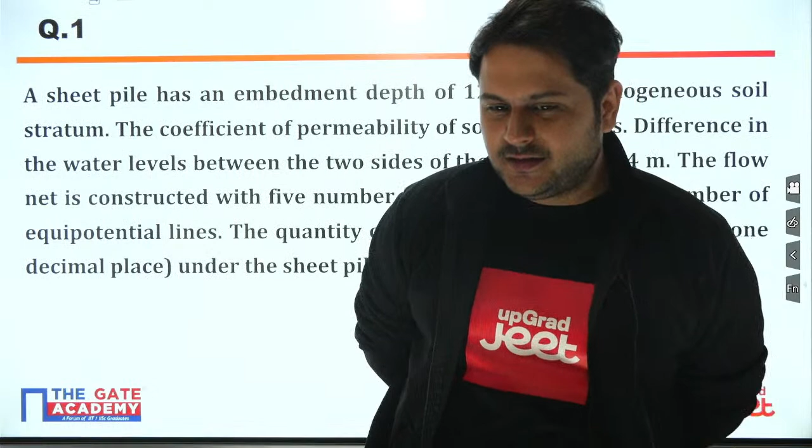Now here is the first question on your screen. Start solving the question straight away. We will not waste any sort of time. Just go straight away for the question, everyone. Go for the question. Attempt the question, everyone.

Now, many of you must be getting confused whenever you see the sheet pile. Sheet pile is never to be confused with any sort of foundation, right? It is not a foundation, right? It is something different, okay? So what it is actually, you'll be telling me, right?

All right everyone, all right everyone. So you are telling me straight away what is the right answer for this question. I'm waiting for your replies, everyone. I'm waiting for your replies.

Now, this is a good question, and the people who are into the touch of this will only be able to answer it.

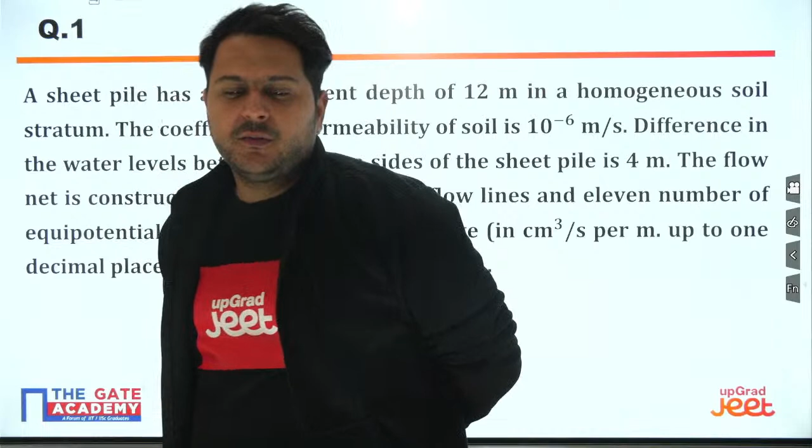Vivek, what was your number of questions? Bache, Rahul, how many questions you applied? See, as I always say, the more the number of questions practiced, the better is going to be the All India rank, as I always say this.

And again please try to understand this thing here. I promised to you on the first day when we were applying the very simple sort of questions for the geotechnical engineering, that we will have better and even more difficult questions on the third day and the fourth day. Now you can see the first question of today is a bit on the difficult side, and only one answer I have received so far.

Very good, very good. Subject can be any, Vivek. I am not asking you to apply questions of geotech or environment or transportation or structural or my subjects only. It can be any subject, right?

Chetu, see, test series is always good, but before entering into the test series, all of you should be able to apply the previous year questions. So the first priority is applying the previous year questions and then entering into the test series, because for previous year questions you also have the solution for them, and you have also studied the concepts related to it. So what if you are going for a good test series? No bache, the test series are always made a bit difficult, good test series, good institute, right?

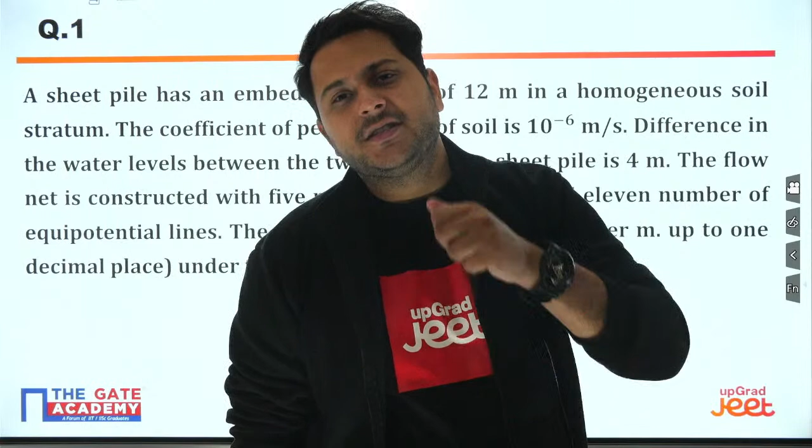Whenever you are going for a test series, you may find that your score is a bit low compared to the actual score you will be scoring. Never get depressed about the test series if you are scoring low. First priority is to apply the previous year questions, then enter into the test series. Also, if you can apply test series which are topic wise, that would be even better.

Now coming to today's class, as I said previously, the first day will have easy questions, second day a bit more difficult, and third day better questions.

Just one of you have given the answer for this question. Anyone else who wants to answer this?

1.6. Very good, very good, very good. Now, before entering into the question, let me read the question for you people before I start solving it.

The question says: a sheet pile. Now, as soon as someone writes sheet pile in front of you, you must be able to understand what a sheet pile does. I am asking it to you, Mayank, I am asking everyone, why is a sheet pile used? What is the major purpose of using a sheet pile? Please answer in the comment section immediately.

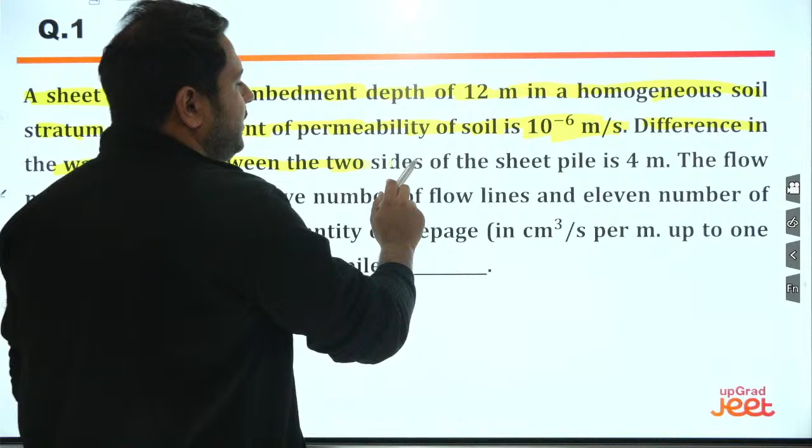Embedment depth of 12 meters in a homogeneous soil mass, in a homogeneous soil stratum. The coefficient of permeability of soil is given, and the difference in water levels between the two sides of the sheet pile is 4 meters. The flow net is constructed with 5 number of flow lines and 11 number of equipotential lines.

Now please remember how many. I will highlight this with another color. What is the number of flow lines? 5 number of flow lines. Just have to remember this: 5 number of flow lines, and 11 number of equipotential lines. So I have highlighted it with another color.

Increase the flow path to avoid quicksand. Good try, man. I'll tell you exactly why we are using this. Okay, so just have patience.

Now, the quantity of the seepage up to 1 decimal place under the sheet pile.

Now see, I'm just asking you a simple question: why is a sheet pile used, and all of you are not able to answer it. Just a few of you are able to answer it. Why? Mayank, you gave a very good attempt at your answer, but that cannot be considered the exact answer, right? Now, the purpose of sheet pile is not to avoid quicksand always.

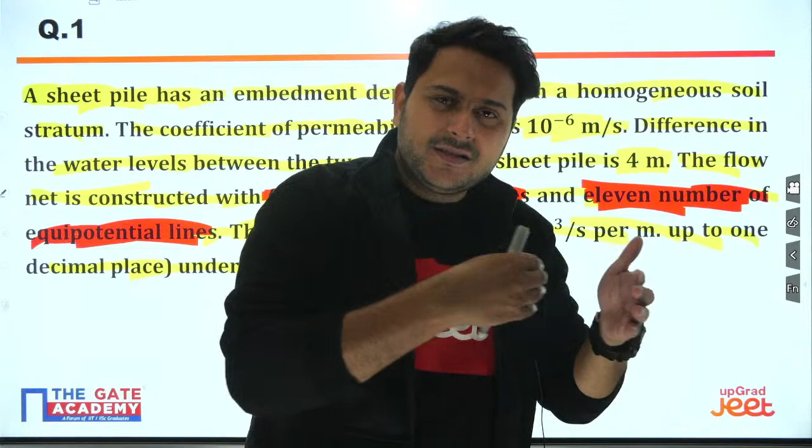The primary function of sheet pile is to avoid piping, the failure of piping. Now, quicksand is one of the outcomes of piping. So I'll conclude by saying one line: all quicksand failures are caused by piping first, but all piping may not result in quicksand.

Please understand it, I will repeat it. All quicksand conditions occur after piping has happened, but all piping may not lead to a quicksand condition. I hope you get the difference between your answer and what the exact answer is, right?

So I'll make a diagram to make it clearer for all of you so that you can understand it more clearly. Please try to understand this, everyone. Before I start solving this question, let me make the diagram for it.

The diagram for this question will include: suppose this is the level at which this is the ground level, at which we are making the considerations. Now, suppose this is the sheet pile under consideration.

Now, different types of sheet pile and different functions of sheet pile I have already taught in class, for those who have attended the Geotech classes with me, and those who studied it anyway must have studied the functions of sheet pile. Now, whenever there is a sheet pile, the level has to be shown by this type of surface only. This is the one level, this is the second level.

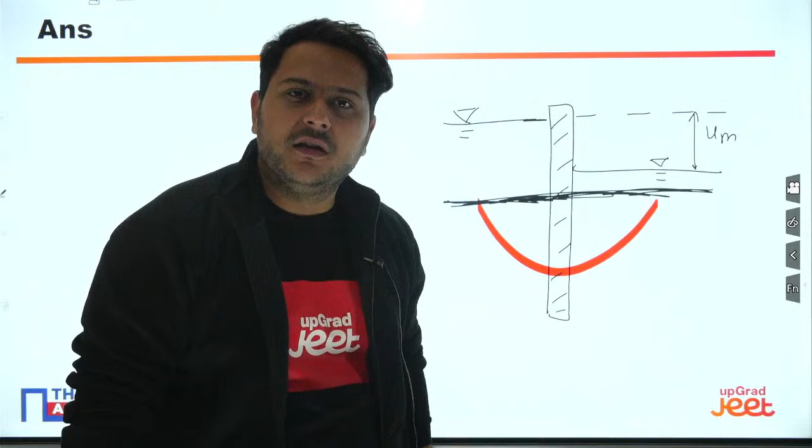But is it always necessary that as soon as this piping is formed, the quicksand condition will form and this entire thing will fail? No. The piping, when it continues for some time, when it reaches the value of I is equal to IC, then it results into the quicksand condition. Is it clear to you now? Okay, since it is clear to you now, I know it must have been clear to you.

I'll just complete the diagram now. What does the diagram say? We have to make the flow net. Now, how the flow net is made? Flow net is very simple. This is how the flow net is made, right? So what actually we want to do is we want to create a hindrance, a hindrance to the passage. Now, this is what I have made. This looks like a flow net now. Okay, absolutely clear now, very good. Now, this seems like a flow net to you, everyone?

All right, now consider the question. Once you have seen the diagram, you can consider the question also now. Let us consider all the parameters one by one. What is the data given to you? The first parameter given to you is K. What is K? Very good, equipotential lines. Now what is the first data given to you? This is K, and K is given to you as 10 raised to power minus 6 meter per second.

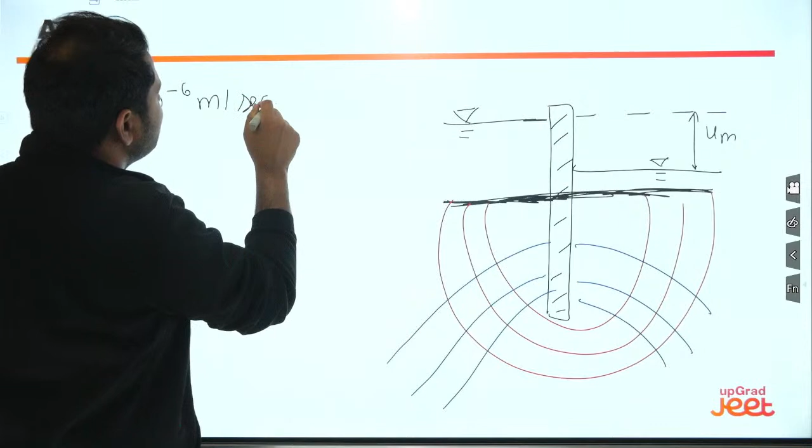Second is the value of H. Now what is the value of H given to you? This is 4 meter. I'll just see the data first.

Now I'm talking about the data from where you may find some confusion. Some of the students may find confusion in this data, which I'm going to discuss right now. The very first data is number of flow lines. Please understand, I'll show you two things here. One is the number of flow lines. Now, number of flow lines here are given as 5. What is the number of flow lines given? 5. Now you are going to tell me, if number of flow lines are 5, what is the number of the flow channels?

Tell me, what is the number of the flow channels? Waiting for your replies, everyone. If the number of flow lines is 5, what is the number of the flow channels? Very good. The number of flow channels will be 5 minus 1, that is 4, and we represent the number of flow channels by a parameter known as NF.

Is it clear to everyone? Right, since this is clear to everyone, I'll come to your doubts. Chetu, I'll come to your doubt. Just let us keep ourselves to the concept only for now. Now why there is a difference of one number? Now this includes the boundary flow line. If I say why this is 5, this includes the boundary flow line.

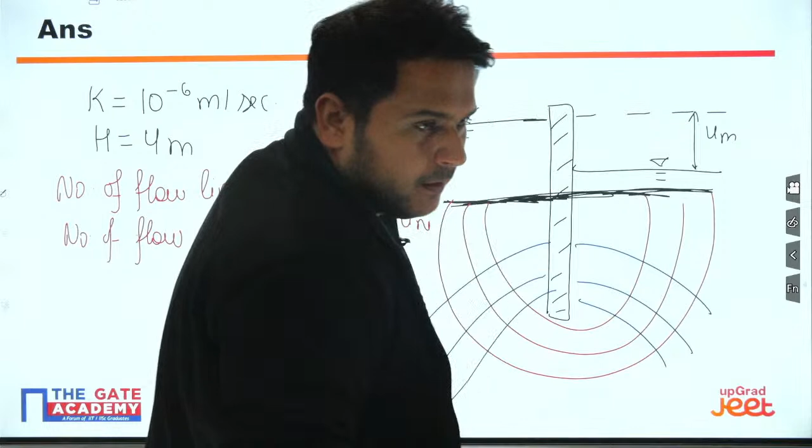Now second thing, you have got the NF. Now second thing which you need to enter here is, what is the number of equipotential lines given to you? It is 11. So if the number of equipotential lines is 11, what is the number of equipotential drops? Tell me quickly, everyone, what is the number of equipotential drops?

This is nothing but 11 minus 1, that is your 10, and we represent it by ND. So we have all the parameters K, H, NF, and ND.

So what is the value of Q? No man, it is 10. It is not 12, bache. It is going to be 10.

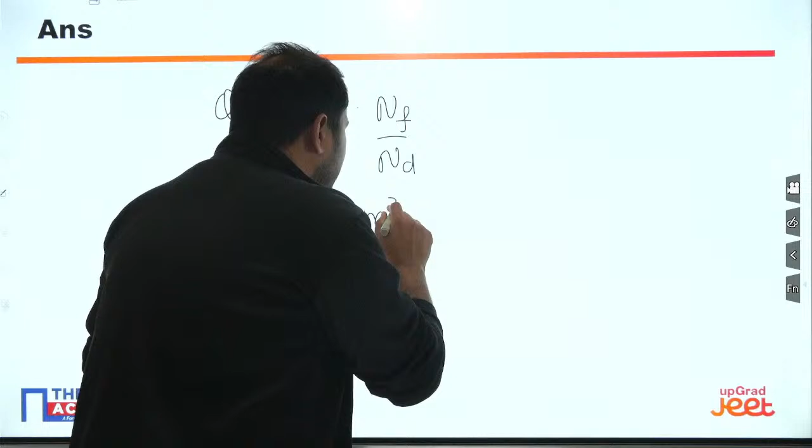Now see, once you will be done with this, I'll just tell you something, a very good concept, something very nice. Done? Very good also, very good.

Now, do you think, once you have got all these values and this understanding of the formula, this question deserves to be asked in the GATE examination? No, this does not deserve to be asked. Why was this question asked? I'll tell you.

This question was asked in order to make the students confused about the units only. Please mind my words, in the GATE examination, 10 to 20% of your questions you will be making wrong just because of the calculations and the units. If you are strong at the calculations and the units, mind my words, you will be scoring 10 to 20% higher. So if you really want to boost your GATE scorecard, what you need to do is have expertise in the calculations.

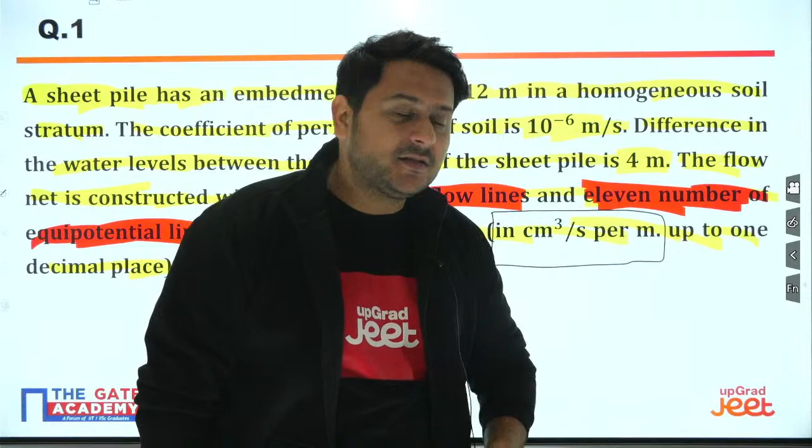If you're not having the expertise in the calculations, you won't be able to score good in the GATE at least. You may clear the examination of engineering services, you may clear the state services, but talking about GATE in particular, GATE demands mathematics, GATE demands calculations.

My students know it already, they know it. I keep saying it in all the classes. So please, it is a humble request to all of you that you make your calculations strong. This question was asked in the GATE examination just because of these units only, to confuse the students in terms of the units, from where it came. If they are asking the quantity of the seepage, why does the seepage have to be in this unit?

I am continuously suffering from this. Yes, you will keep suffering from this.

Okay, since we are having this wonderful discussion of mathematics, tell me something. What is the difference between the students studying in IIT and students studying in private engineering colleges? Why is there an examination named GATE? Why do IITs conduct it? Why do IITs always anticipate where the students of private engineering colleges or other colleges will fail? They always know that it is the calculation only, mathematics only, where the students from normal colleges will get trapped and the students of the IITs will always pass through it.

So please try to understand my point, everyone. It is the mathematics you need to work on, the calculation, then only will you be able to score high. I hope I was able to convey this particular thing to you, right?

Anyways, let us proceed. So I am presenting question number 2 to you people, and you have to be absolutely quick in solving it, right?

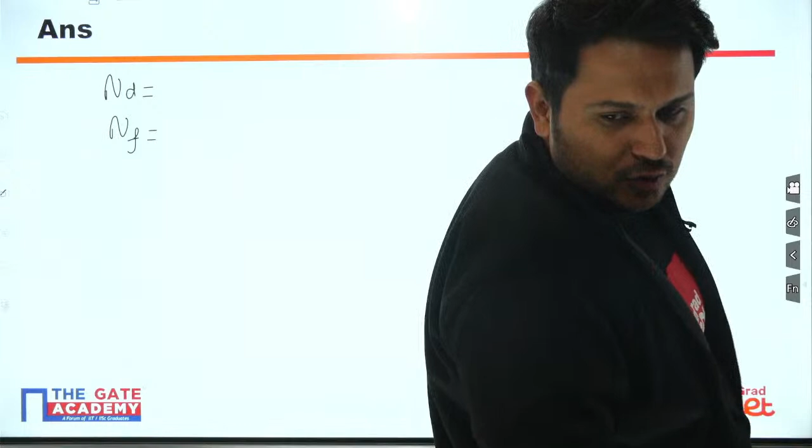What are the parameters? As soon as I write ND is equal to and NF is equal to. So those who are starting to solve questions right now, those who have not solved any number of questions before, must understand that this is the best technique. You write the values first, you write the data first, and then enter into the questions. This is always going to be better for you people.

So this is ND. ND is given as 24 and NF is given as 7. What is the value of H given?

Given as 6 meters. Now, at the toe of the dam, this is given as delta L. At the exit and the entry are the two cases. Here he is talking about the exit, so I'll mention it at the exit only. So this is 1 meter. This is the data which is given to you.

Now, how do we calculate the delta H? The calculation of delta H is very simple. Whenever I divide H by ND, what will I get? H is 6 and this is 24. So this is coming out to be, delta H is coming out to be 1 by 4.

Chetu, your doubt from the previous question has been covered here and will be covered further. I am trying to establish a relationship for the factor of safety. What is it? It is IC upon I exit. This is the factor of safety against piping.

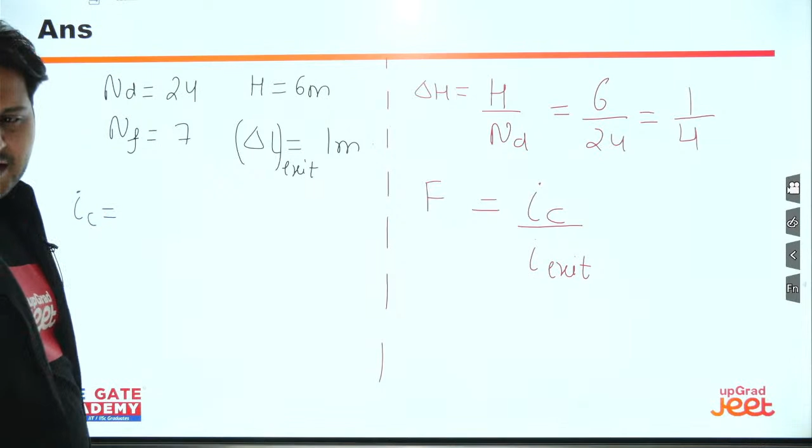So what is the value of IC first? Let us calculate the value of IC. How is IC calculated? A very simple formula which we used yesterday: it is G minus 1 upon 1 plus E.

So what is the value of G given? G is given to you as 2.70, and E is 0.70. Let us solve it: this is 2.70 minus 1 upon 1 plus 0.70.

So what is the value coming out to be for IC? The value of IC is coming out to be 1 only. So you have got IC also, everyone.

Now once you have got IC, let us calculate the value of I exit. What is the formula for I exit? It is delta H by delta L exit.

This is coming out to be 1 by 4 only. So we just put the values: IC is given as 1, and I exit is 1 by 4. So what is the factor of safety coming out to be? FOS against piping failure is coming out to be 4. Is the calculation clear to everyone?

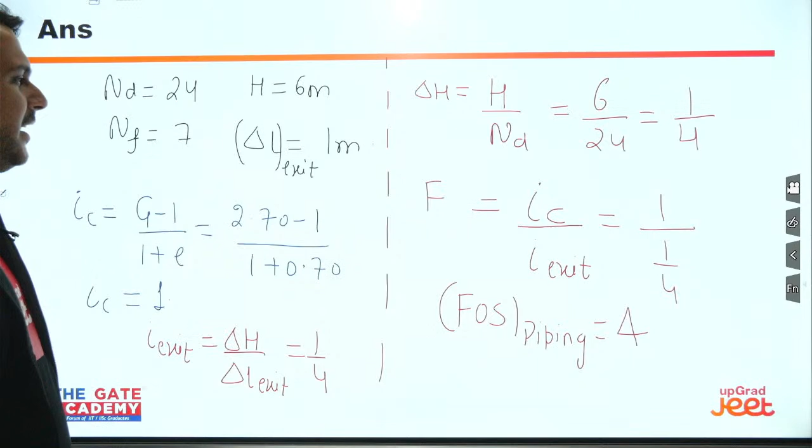I'll just repeat the statement I made in the previous question. GATE will always try to confuse you in the mathematics. Basically, there are only a limited number of formulas. Out of those formulas, they will give you certain parameters and ask you to calculate another parameter. So here, what we did, I did on the same page just to make clear that all the same formulas are used. There is no separate formula.

So I am giving you a trick. I don't know if this trick will be practical for you or not, but I am trying to give you one. Whatever is the final question being asked, suppose he is asking the final question here about the factor of safety, he is asking the FOS against piping. This is being asked.

How to approach such questions? I am giving you a trick for this. You just write whatever is being asked: FOS piping is asked, so you write the formula for it. When you write the formula, you will find that in some questions these values are directly given if it's a 1 mark question. In some questions, the value of one parameter is given and the second has to be found, then the value has to be put.

So what you can do is write this formula and see what data is available to calculate IC. Then see I exit: what is the formula for I exit and what data is available for that? Once you approach like this, you will form a sequence and be able to solve the questions more easily. I don't know if you can apply this trick, but this is what I followed when I was an aspirant.

Is this clear? Like this, if you solve, you will not find it a puzzle. Okay? Got it, got it? All right, does anyone have any doubt in this particular question? No, right? Very easy to solve.

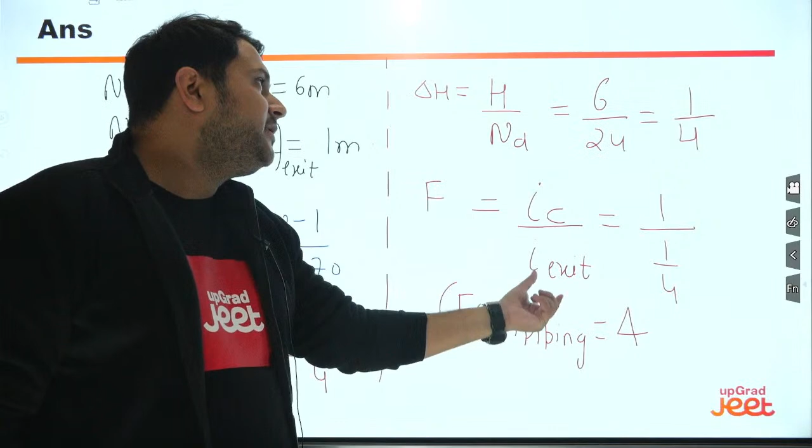We were supposed to calculate FOS as IC upon I exit. What is the formula for IC? All the values are given, so we calculated it. What is the formula for I exit? Delta H upon delta L. Delta L is given, delta H can be calculated by H by ND, delta L is given, so we can calculate it. We are proceeding with it now.

Okay, so here is the next question, please solve it. Please solve it, everyone.

What is the Laplace continuity equation? This is what being asked here. How many of you have seen this earlier?

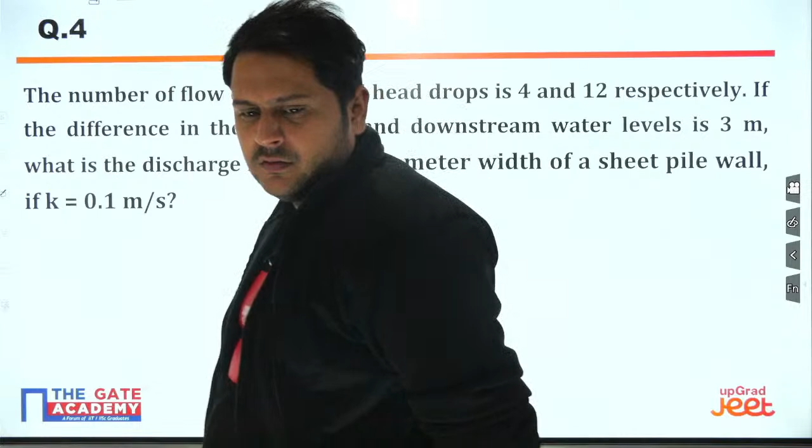So just solve it, and then this is very easy. Very good, man.

Very good. So what is the formula? What is the data we are having? The data is the number of flow channels and head drops. This is 4 and this is 12, respectively. If the difference in the upstream and downstream water level is 3, so this is your H, this is your NF, this is your ND, right? What is the discharge in meter cube per second per meter width of the sheet pile? K is this, right? So what is the formula for Q?

Q is nothing but K into H into NF by ND. So what does it become? This is 0.1 into H is your 3 meters into NF is your 4 upon 12. So this will become what? Cancel, so this 4 will get cancelled. So this is 0.1. This was an easy question now.

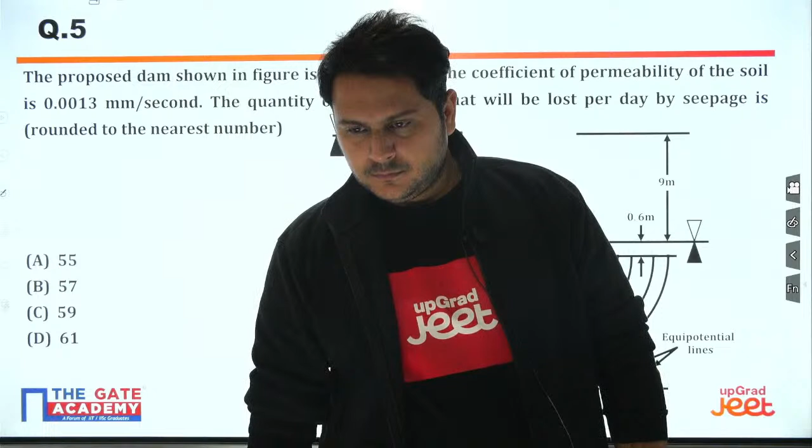Neha is ready with the answer. Anyone else? Neha is ready with the answer. Anyone else? Vivek Raj with the answer. Alright, anyone else?

Very good, all of you. Again, this question was of the same unit only, because they were trying to confuse you in the units only, right? So it will be lost per day. So they are trying to confuse you in the numbers only. Anyways, all the parameters are given to you here. No need to get confused by this diagram. As I said, if this diagram confuses you, please keep this thing in mind: more the data given, easier is going to be the question. If the data given to you is more, the question will be easier. Just try to get this thing in your head, right?

So what is the data given here? If I want to write the value of H, what is the value of H given? H here is 9.6 minus 0.6, so this is your 9.0 meters, right? What is the value of NF? This NF here is 5, right? NF here is 5 and ND, these values are already given to you, 8. ND is here 8. So NF and ND are already given to you, right? Now, talking about the data of K, this K is given to you as 0.0013 mm per second.

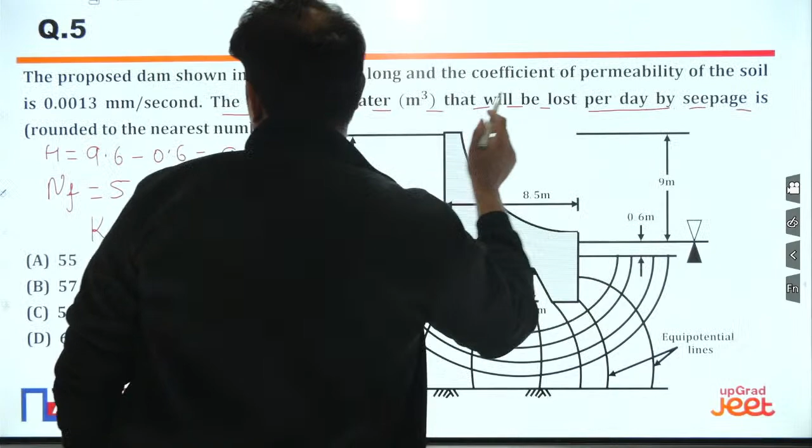Now they are asking for the entire length. What is the length? Dam shown in the figure is 90 meter long. So they are asking for the entire length. So if you multiply it by 90, and see which answer is matching, it should be approximately 57.

Since we have done so many questions like this before, this is why I have done it on this page only. Right? If you face any issue or doubt into it, just let me know. I'll explain it again. Okay?

All right. How many of you got this? How many of you got this? Okay. Who is going to tell me why we multiply it by 90?

Because they're asking you the total seepage loss. So write it as the hint: total seepage loss. Whenever they are asking the total seepage loss, in that case, you will calculate for the entire length. You will calculate for entire length in that very case only.

Right? So whenever they are asking you for total seepage loss, you will calculate for entire. I hope it is more clear now. This is the note sort of thing or a hint for you people for the next questions. Shall I proceed to the next question, everyone?

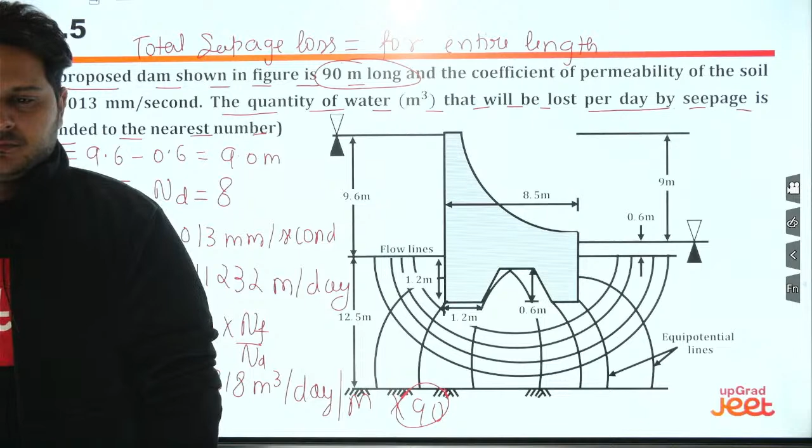All right. Proceeding to the next question. This is the next question for you people. Just try to answer it as quickly as possible. Okay, answer this, everyone.

Where ND and NF are mentioned? Okay. Revati, just do this question first. Try to solve it, and then I'll go back to that question. I'll show you where it is mentioned. Okay, bache? Just solve this question. All right.

I just don't want to disturb everyone in between, so just solve this and then I'll go back. That has to be concluded from the figure itself. Okay. That has to be mentioned in the figure itself. I'll show you how to calculate that.

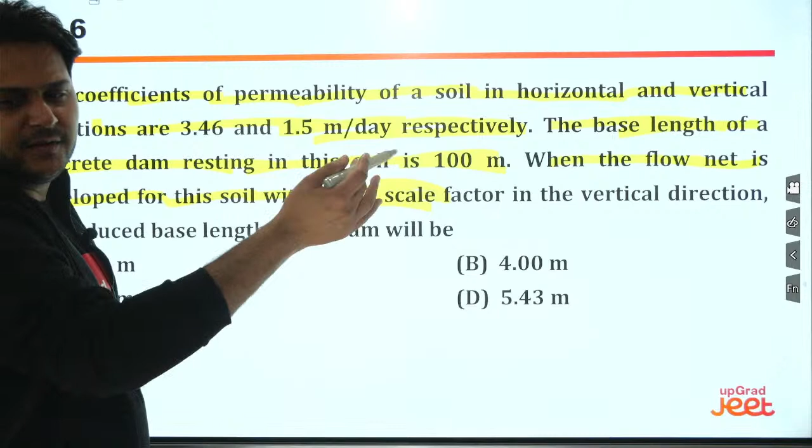Now, what is the question asking? Let me read the question for you first. The coefficients of permeability of a soil in horizontal and vertical directions are given respectively. Now, the base length of a concrete dam resting in the soil is 100 meter. When the flow net is developed for this soil with 1:25 scale factor, they are using the scale factor also. What they have done is introduced some other concept into the single concept, and it became a difficult question for the students, right? But it isn't a difficult question actually.

So, in the vertical direction, the reduced base length of the dam will be what? This is what they are asking. Okay, let us solve this. When we start solving this, let us write the data first. Now, what is the value of kx and ky? I'll write the data here. The value of kx is given as 3.46. What is the value of ky? The value of ky is given as 1.5. Both the values are in meter per day.

Both the values are in meter per day. All right, now once you have the kx and ky, reduce horizontal dimension. Now what they are asking, what is the reduced horizontal dimension? Now, who can give me the value of b?

Who can give me the value of b? Anyone with the formula under root of? If you remember, I discussed this formula in the class also. How many of you remember this? I use this formula in the class also. This is kx by ky, ky by kx.

So just you have all the data. What is the value of capital B? All the data you know. What is the value of capital B? This is given as the total base. This is your 100 meters, right? The total base. Now, how many of you can get this value?

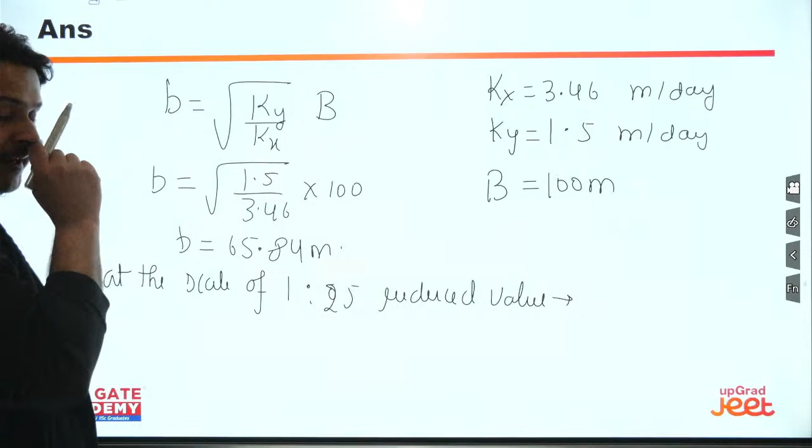No, this is a good formula, this you should be knowing. Very good, very good. So anyways, you can see this now, I have mentioned it very clearly. So we have calculated this small b, and what we will do on the scale of this, the reduced value as per the new scale is going to be 65.84 divided by 25. So this will come out to be the new value, 2.63 meters. So this is a very easy question for those who know the scale conversion and this formula. So straight formula based question. Very good, so this is a straight formula based question.

All right, how many of you are clear with this? Everyone clear with this? Now this formula, if you want to write it in your notes, you can write it. This is the formula. This formula is for what?

This formula is for what? This is the reduced horizontal dimension, right, for the transformed section. I will write it here only. This is the reduced horizontal dimension. Right?

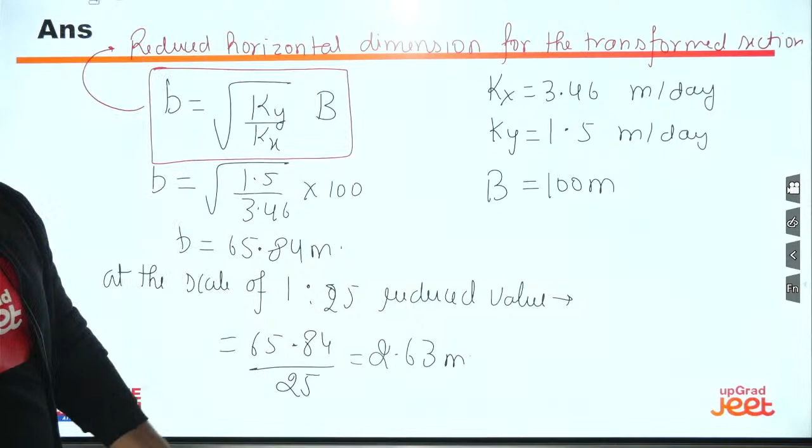No issues, so I've given you the formula for the transformed section, if you want to write it. Alright, shall we proceed to the next question? Very good, very good, shall we proceed to the next question now?

Alright, what is the next question? The next question, this is a common data question. So see this data first and then I will ask you the question. See this question first and then I will tell you what the question is.

You have seen this data, taken this screenshot, everyone? Noted down the data. Then I'll give you the question.

Right, now let us see the question. This is the first question. What is the seepage loss? This is the first question for that data. If you have not seen the data, please tell me again, I'll show you the data again. This is a common data question, right?

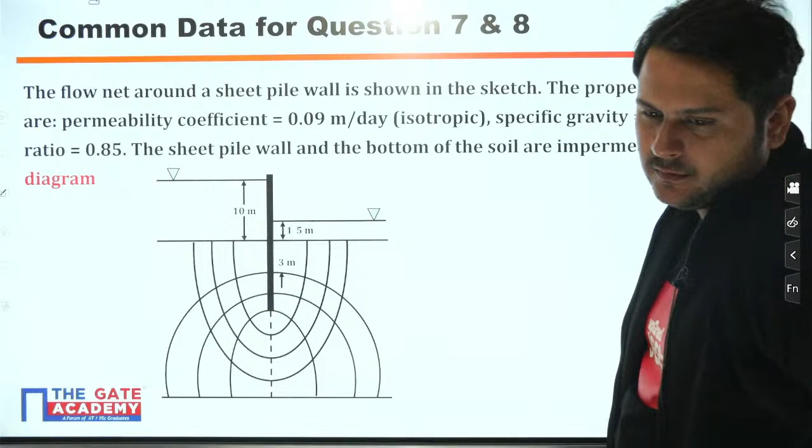Moving back to this, this is the question. That was the data for the question. Now, since I have got 3 answers, I'll start solving it now.

This is a very easy peasy question. What does the question say? First of all, let us calculate the value of H. The value of H is coming out to be 10 minus 1.5, which is 8.5 meters. Here it is given, this is 10, this is 1.5.

Now, what is the value of NF and ND? NF is given in the diagram, you can easily find it, this is given as 4 and ND is 8.

Now once you have all these formulas, Q can be calculated by K into H into NF by ND. So what is the value coming out to be? This value should come out to be 0.38. Yes, this is the value coming out. So make the calculations, concept will be given by me and the calculations will be done by you.

If you face any problem, ask me. K is given to you as 0.09, the K is 0.09. So make the calculations.

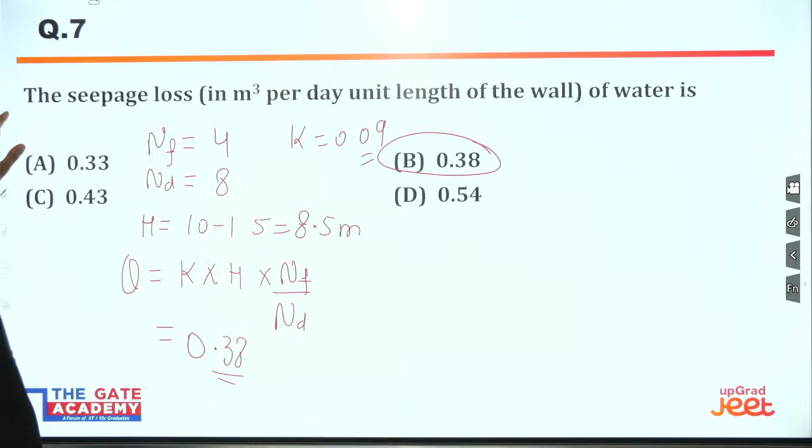Okay, on the same data, I am giving you another question. This is a bit good question, make it. The factor of safety against piping, against the occurrence of piping failure.

I told you earlier also, what is the formula for factor of safety against piping? I gave you the formula. The formula was FOS equals IC upon I exit. Now see, what is required for IC and what is required for I exit? Make the calculations, see what data is available and what you have to find out. It is a very easy question now. All right, just make it.

Now in the figure I'll just show you all the data. Don't worry, it's IC by I exit. Very good, Chetu, so make it. I just gave you this formula, make the calculations. Everyone is going to solve this.

Very good, Neha. Neha is ready with the answer already. Very good, Bach. What about others, able to solve it or not? Tell me, you're able to solve it or not, everyone? You want to see the data? This is the data. For this data, make the calculations.

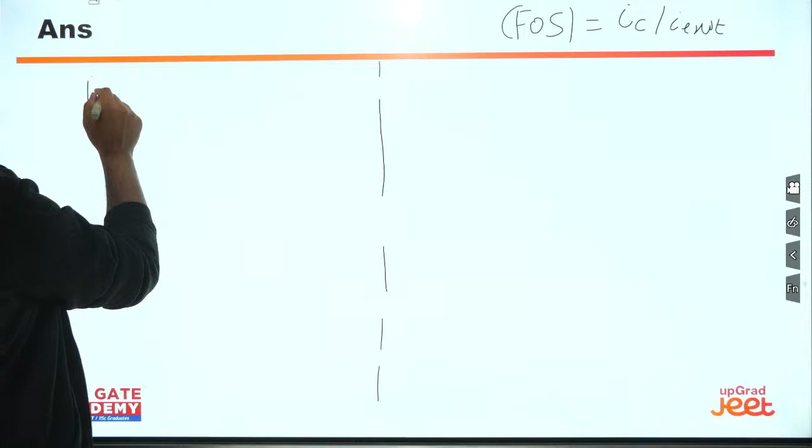Now, this question can be divided into two parts. What is the value of IC and what is the value of I exit? I already told you, I am starting from I exit, you can start from IC also. So this is delta H by delta L.

I asked you delta H. The formula for delta H is, I explained you earlier, this is given by the formula of H by ND. Now what is the value of H? The value of H we just calculated in the previous step, this value was 8.5.

What was the value of ND? We already know the value of ND, this is 8. So this value is coming out to be 1.0625 meters. I guess this is the value. Yes, this is the value.

Now, what is the value of delta L? Please see this, delta L in the figure. If you will see the figure very clearly, this value of delta L is already given. I'll mark it with some other color so that you can see it more clearly. You will easily find that the value of delta L is given to you as 3 meters.

So we will go back to the question. Delta L is given to you as 3 meters in the diagram only. So you have both the values now. Put the values, get the answer.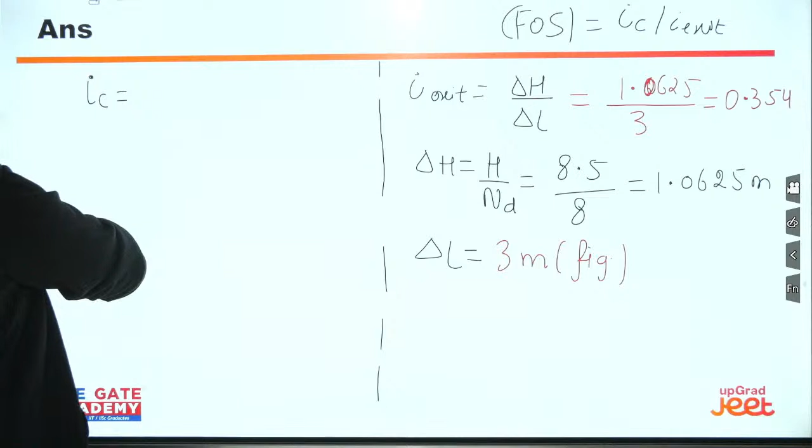If 0.354 is the value of I exit, what is the value of IC? The formula of IC we have written on the screen many times now. This is G minus 1 upon 1 plus E. The value of G is given as 2.70, so 2.70 minus 1, and the value of E is given as 0.85.

Now, when you perform the calculation, the value of IC is coming out to be 0.919. Now you have both the values. If you want to calculate the value of FOS against piping, what is the value coming out to be? The value is IC upon I exit, which is 0.919 upon 0.35.

So what is the value coming out to be? The value will come out to be 2.60. Now this question, which seemed like a puzzle to you in the beginning, you have given the right answer for this question this time. Why? Because you are solving it for the second time. Where is the answer? This is the answer. Is this clear to everyone?

Is this clear to everyone? Yes or no? Crystal clear, okay bache.

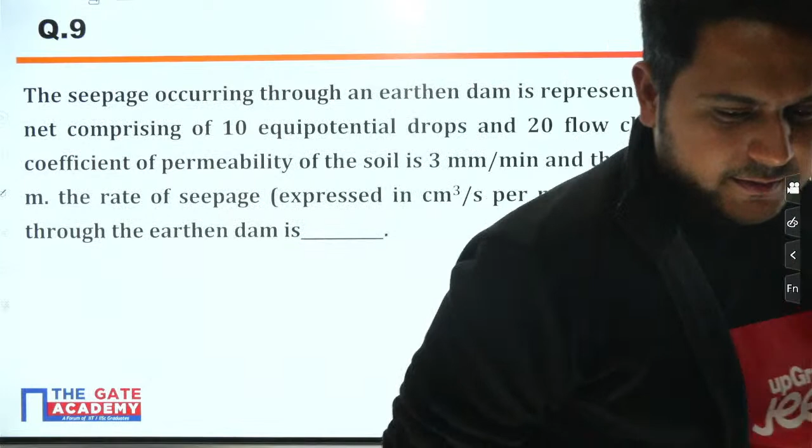Right, so you're all set to apply the next question and give me the 100% correct answer. See, you will give me the 100% correct answer. How? See this, this is the next question. Apply this and all of you will give me the right answer. I know that all of you will give me the right answer. Okay, Chetu, solve this.

Anyone with the answer? Man, I'm expecting the right answer this time. See, even after the entire data, even after knowing the formula, if you are getting the wrong answer now, that means you need to work on the calculations. Calculations is the key.

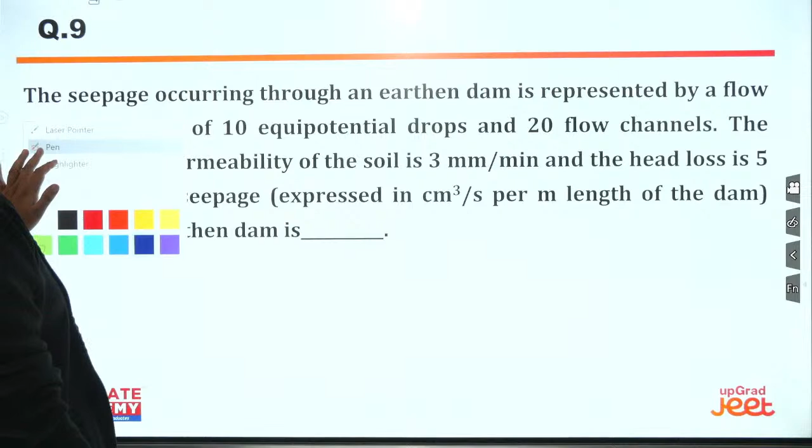The seepage occurring through an earthen dam is represented by a flow net comprising of 10 equipotential drops and 20 flow channels. The coefficient of permeability of the soil is given, and the head loss is 5 meters. The rate of seepage expressed per unit length of the dam is to be found through the earthen dam. So this is what you have to solve.

I don't know why you failed to solve this question. This makes me a bit disappointed. You got the answer now? Yes, calculation is very tricky here.

See, I'll tell you again the thing which I have told you plenty of times. GATE will judge you on some 4 to 5 parameters. First parameter is your mathematics knowledge. Second is your calculation knowledge. Third is your unit conversion knowledge. Fourth is your formula memory, if you are able to memorize the formula or not. So these are the parameters where GATE is checking, right?

Anyways, so what is the value of NF? The value of NF is given as 20. The value of ND is given as 10. So value of NF and ND is already given to you, right? What is the value of H? This is given to you as H, which is 5 meter.

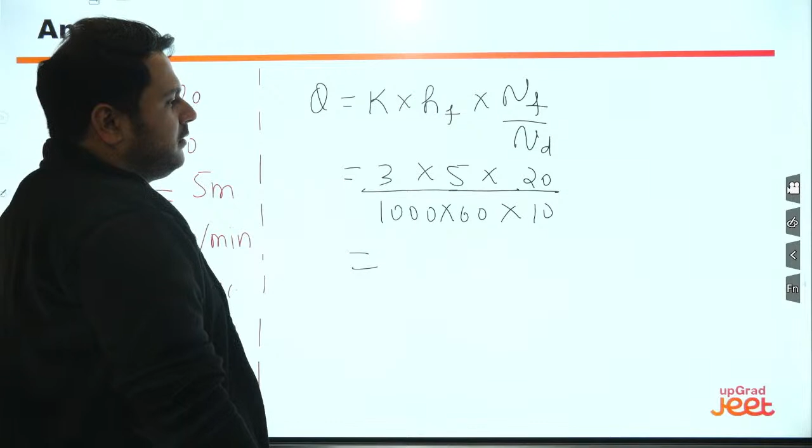This is so easy, isn't it? Solve it, get me the answer. The answer you will be getting is 500, centimeter cube per second per meter. This is the value. This is very easy by the way. Solve it, everyone, solve it.

Now tell me something, will you be able to apply all the formulas based on this question? Will you be able to apply all the questions on this formula? Yes or no? Yes, you did a mistake in the unit conversion, right. Will you be able to apply questions on this formula? Tell me everyone, just confirm this.

Bhageshri, Vivek Raj, Rahul, Shubham. You'll be able to apply now? All right.

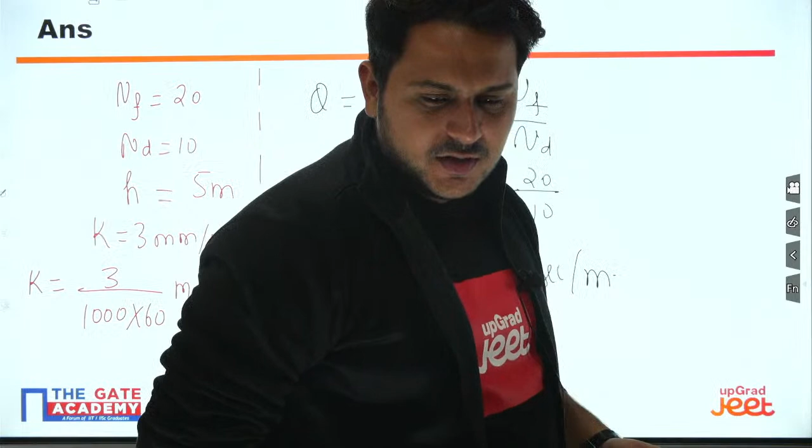Now next, we are switching to the next formula and the next concept. Please see to this, I am presenting the first question to you on the basis of the new concept. This is where the question is. Tell me, solve this question. Solve this question, everyone, select the right answer.

Tell me the answer of this question, everyone. I'm trying to cover the maximum syllabus of Geotech. I know my students will be able to answer it at the very first. Bhageshri, very good, very good. All of you, very good, Neha. Vivek Raj, very good, Bache.

Now how do we calculate it? They are asking about sigma z, right? Vertical stresses at depth z. So they are asking you about sigma z. How do we calculate the value of sigma z? How can we give this value? Tell me. This can be given by. How many of you are answering this?

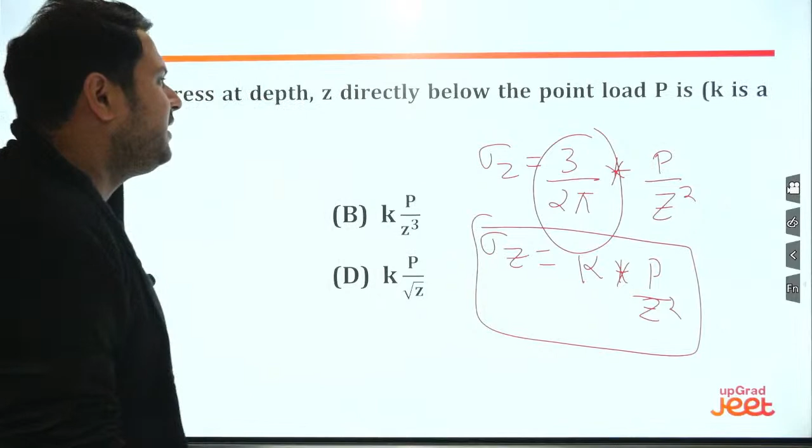Now this value is only represented with the help of a parameter named K, and this is P by Z square. Which is the right answer now? This is the formula. This C is the right answer. Clear, everyone? Very good, clear with this everyone? I've answered this already, can you proceed to the next question now?

The next question is this. Solve it now, next question. Solve it now. Today we are having 18 questions instead of 14. We are having 18 questions in the first session, the first half, and then we have the quiz of 5 questions. So we are already on the 11th question, right? We are already on the 11th question. Keep solving it, everyone.

This is a simple formula based question. Use the Boussinesq equation. This question was asked in the past, they are not asking questions from this particular topic right now. But still I am having this question for you because I want you to remember this formula. Bhageshri, you may face problem in this question, I guess, right? And if you know the Boussinesq equation, you will be through it.

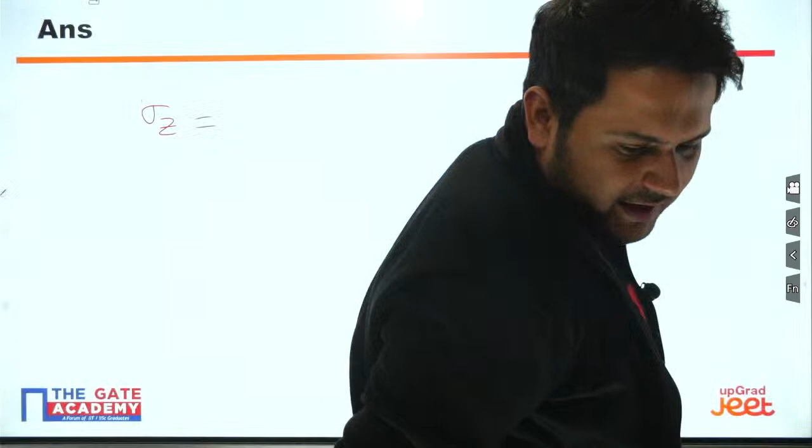What is the formula for sigma z as per the Boussinesq equation? It is P by z square into 3 by 2 pi, out of the bracket. You have to remember this. I'm writing it slowly so you can remember it within the class.

Please understand one more thing: the Boussinesq equation dealt with stresses in all three directions - vertical stress, horizontal stresses in both horizontal directions sigma x and sigma y, and the vertical stress sigma z. So you can have three such formulas: sigma z, sigma x, and sigma y. But the majority of the chances are that the question will be asked from the vertical stresses only, 99.99% of the time.

Why is this probability so high? Because whenever load comes onto a building or a dam, these stresses are generally the vertical stresses only, and we have to consider the vertical stresses only. We need not worry about the horizontal stresses, because they generally do not lead to failure.

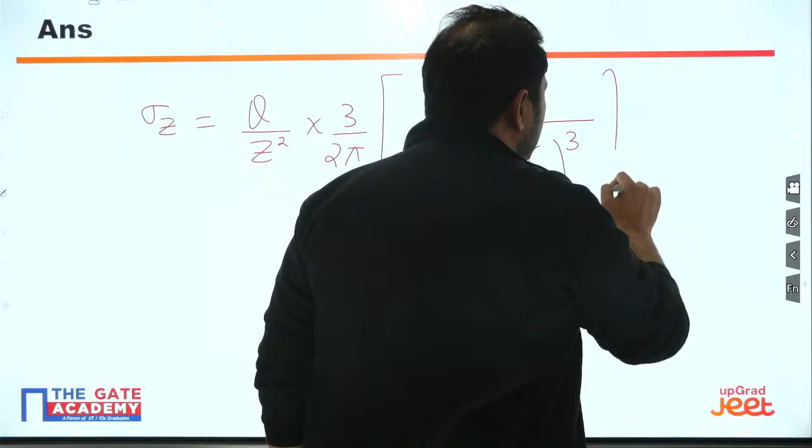So this is 3 by 2 pi, and it will be into 1 upon 1 plus r by z. Now what is this r, what is this z? To understand this fully you need the entire Boussinesq equation, but for now it's easier to just understand the parameters and put in the values.

What are the parameters given to you? The value of q - I'll take you back here - this is the value of q, given as 25 kilonewton. At a point 6.0 meters below, 4 meters away from the load. So the value of z is 6 meters, and the value of r is 4 meters. Now you have all the values.

Just put in the values and get the answer. The sigma that will come out to be is 0.132 kilopascal.

Alright. So those who have not understood the Boussinesq equation so far, what can they do? They can just remember the equation, understand the formulas for the variables, and once they are given in the question, they can easily put in the values. But for now, what I've seen is GATE is not asking questions on the Boussinesq equation for so many years.

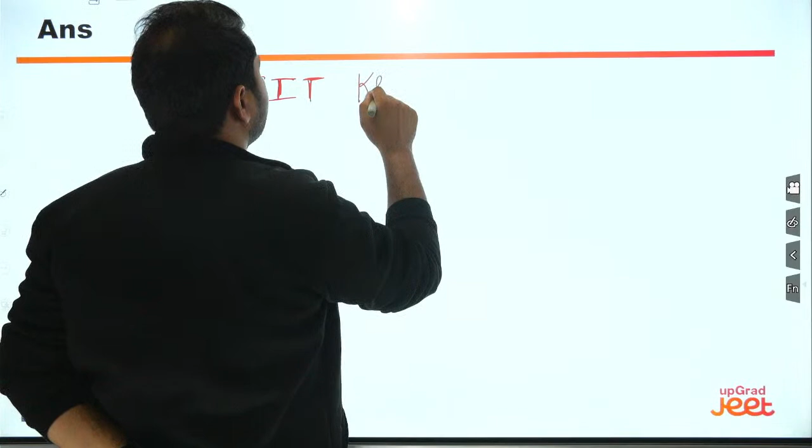I'll tell you my opinion. Things may vary - this is a disclaimer I'm giving you - but for now I'm just giving my opinion. IIT Kharagpur has a very strong department of transportation engineering. When I visited the department and met the members there, I realized they really do have a strong transportation department, so I'm generally expecting them to ask more questions from transportation engineering.

So try to make this very easy subject strong. Transportation is a very easy subject, so try to make transportation engineering very strong, because I am expecting around 9, 10, or maybe 11 marks out of transportation engineering. So this is one thing about IIT Kharagpur.

Second, the difficulty level is going to be a bit high. Why? Because whenever you see IIT Kharagpur's questions, they have always given a bit difficult type of questions, because they always try to introduce some latest techniques into it. I remember when I went for discussions at some conferences, at that time we were considering students of the bachelor's level.

No one asked the question from the FEM, the finite element method, from the BTech students. They generally are being asked from students of masters, PhD, or research scholars. But students of IIT Kharagpur, who were aspirants in the interviews, already knew about FEM since they were being taught it. So what I observed was that they are more involved in the mathematics also. The question may seem difficult to you whenever they introduce some other part of the mathematics.

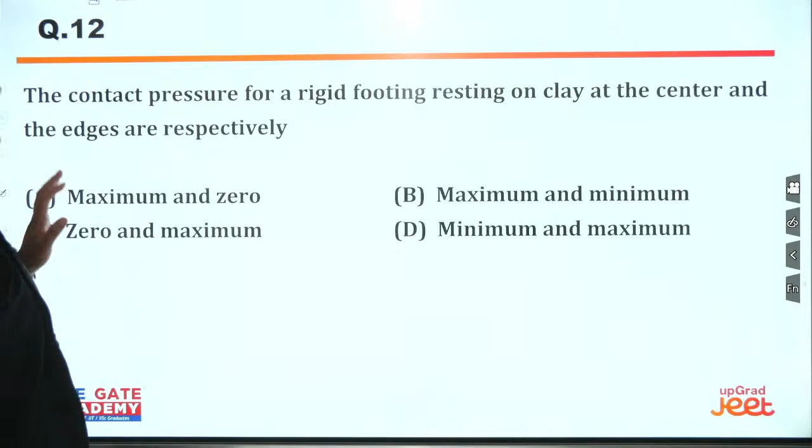This is the next question, tell me. No? You are telling it wrong, everyone? Tell me, I want you to answer this. D. Why? Everyone has answered the same. Why everyone has answered D? How do you know that D is the right answer? Tell me, how do you know D is the right answer? Why not zero? Why not maximum and zero? Why not maximum and minimum?

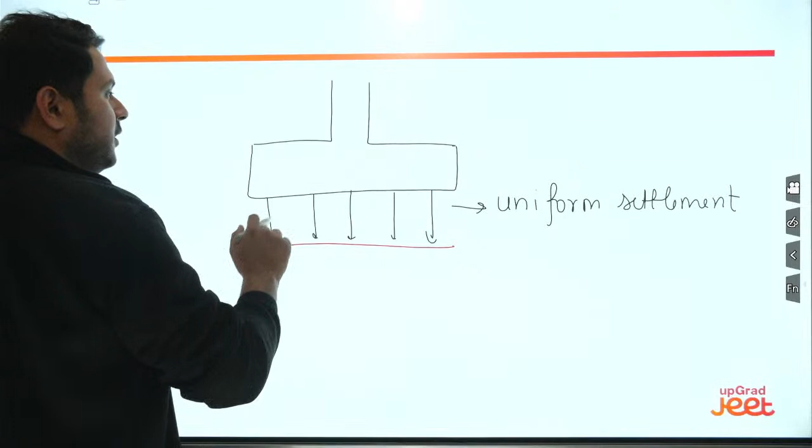Concept number two, when it is settling down, how does it settle? The contact pressure is non-uniform. How is the contact pressure formed? This is the contact pressure. The contact pressure is non-uniform in such a way that it is maximum at edges and minimum at center.

So what was the question? This is the concept, now we will relate the question with the concept. The question is rigid footing resting on clay, at the center and the edges respectively. So center we have the minimum, edges we have the maximum. Is this clear to everyone that D is the right answer? Is this clear to everyone why D is the right answer?

Alright, we will proceed to question number 13 of the day. Please answer it. Answer this, everyone. Tell me, everyone, waiting for replies.

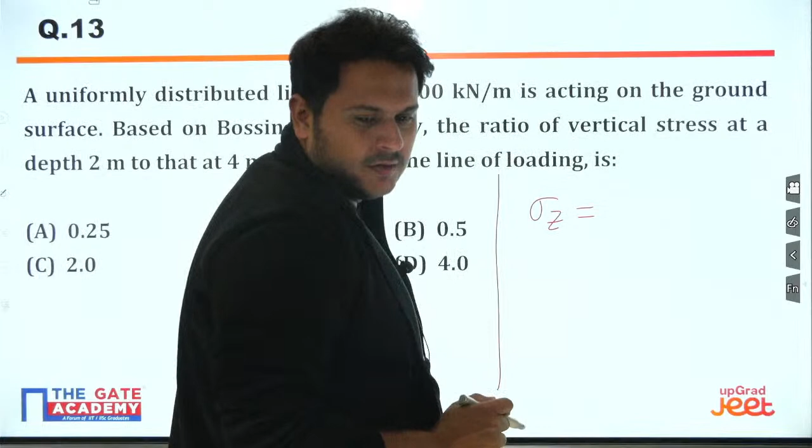Very good, very good. See, what is the concept used here? Please understand, if you remember the Boussinesq equation, what was it? The Boussinesq equation says that sigma z is equated to 2q dash upon pi z. So what we can make, making all other things constant, we can get that sigma z is inversely proportional to z. We can conclude this, everyone. We can conclude this, yes or not? Yes sir, we can conclude this. Once we can conclude this, what do we have? Please try to understand, once we conclude this, what do we have?

We have that sigma z at 2 meter depth, sigma z at 2 meter depth divided by sigma z at 4 meter depth. What is the value coming out to be? This is 4 by 2, and this is 2.0, that is your C. That is your C, this is a very easy question.

Now, what is the question demanding? The question is demanding a uniformly distributed line load of 800 kN. This data is just to confuse you. One doubt of the students is when to know and how to know what data is given to confuse.

Please understand, if this was a 2-mark question, this data would have been used and the solution would not have been this easy. Since this is a 1-mark question, please try to understand - if a 1-mark question involves so much calculation, you have to guess there is something you are missing, some formula or concept. So always try to understand, whenever there is a 1-mark question, there will always be some trick. And this is the trick for this question. Is it clear to everyone?

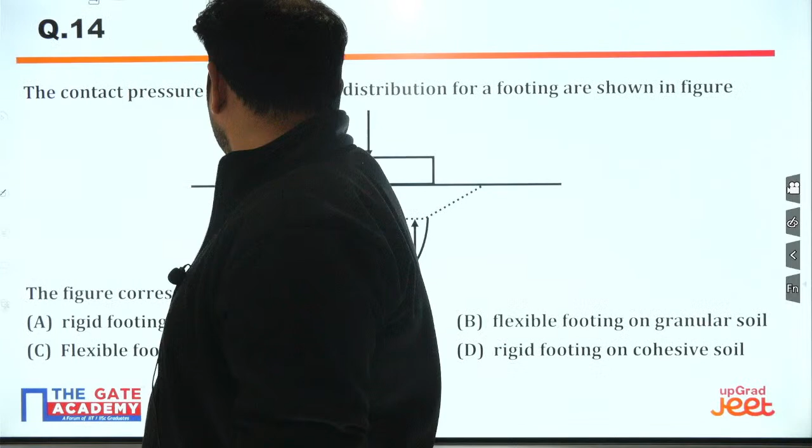Shall we proceed to the next question? All right, question number 14 for the day. Just solve it.

I just gave you the concept.

Check your answer, Chetu. Check your answer.

Bhageshri, absolutely right, absolutely right. Vivek Raj, very good.

See, Bachi, what is this diagram representing? First of all, please try to understand this diagram - this sort of diagram he may give you again also. What is it representing? In this diagram, we are having a few things which you should be knowing.

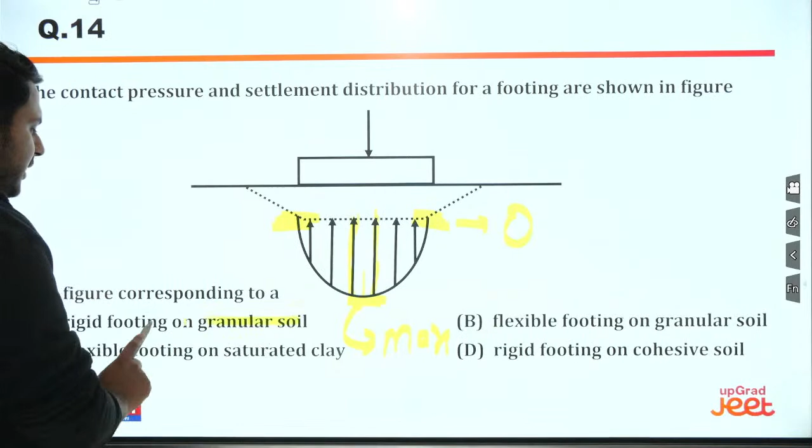Now, when a rigid footing is on the granular soil, we get the edges as 0 and center as the maximum. So this value is corresponding to A. Is this clear to everyone?

Clear to everyone? Shall we proceed to the next question, everyone?

All right, now this is the next question, question number 15 of the day. Now this will make you clear - this concept, this diagram will make you everything clear, right?

Chetu, I will explain all the options here, don't worry. Right, I know this needs an explanation, this is why I have included this question also. But you just give it a try first, and then I will explain.

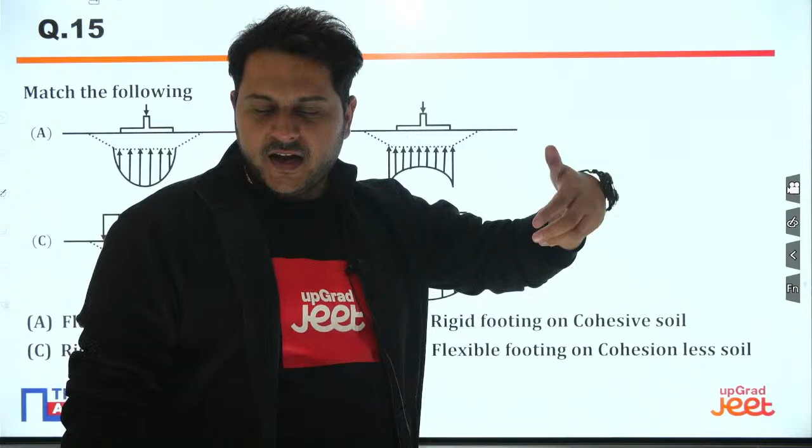Okay, let us do one by one, and you will put a thumbs up after every clearing of the concept, right? So let us consider the first case.

In this case, what we are having - consider the edges. On the edges, we are having the 0 value, and at the center, we are having the maximum value. Now this case we just discussed - where does it happen? This happens when a rigid footing is on the granular soil.

When I consider the granular soil, what does it mean? When I say granular soil, does it mean cohesive soil or cohesionless soil? Tell me, who is telling me?

Cohesionless? Very good, that means sand, grain. Now, so this belongs to C - or let us write this as first, this is second, this is third, and this is fourth. Now so A belongs to - I'll keep writing here - A belongs to third. Is this clear to everyone?

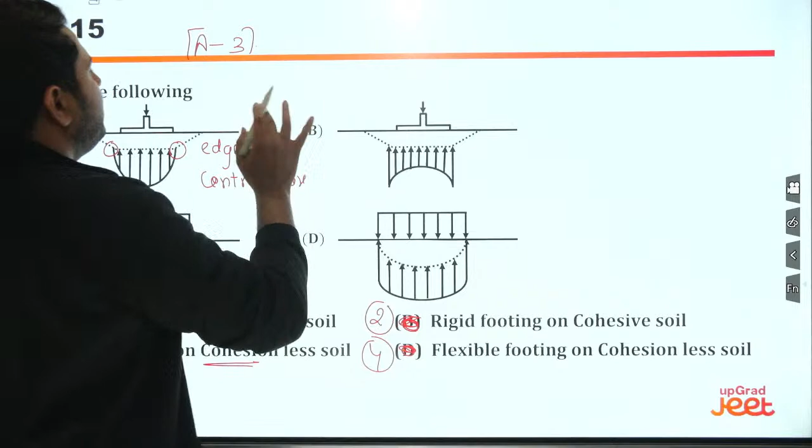Now, let us consider the B part. In B, what we are having - these are the edges. On the edges, we are having the maximum value, and on the center, we are having the minimum value. Now, this is a case of which? Out of 1, 2, and 4, this is which case?

This is your second case - rigid footing on the cohesive soil, like clay. So this B is corresponding to 2.

Now let us enter into C. On the C, if you are seeing, what is the value? What is the value of C?

What does it mean? This is seeming the same, but this is representing the flexible footing. Why is this representing the flexible footing? Who's going to tell me? This is representing the flexible footing. Tell me.

When the flexible footing is on the cohesionless soil, it will undergo non-uniform settlement. There are two points which I will be writing. One is the settlement. This settlement is going to be uniform or non-uniform. This is going to be non-uniform.

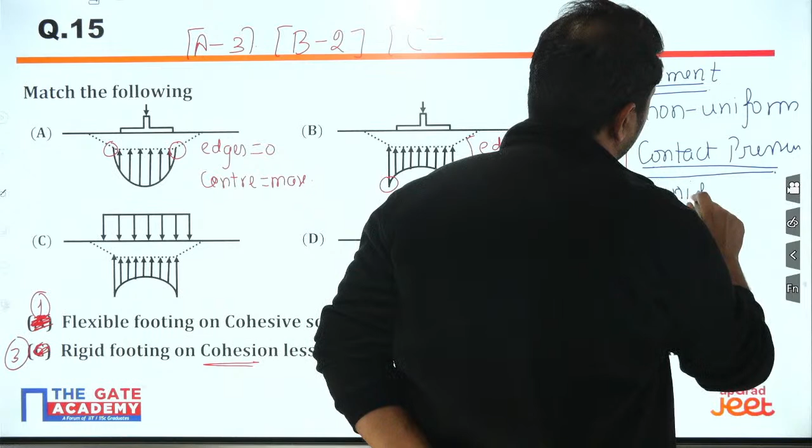The contact pressure, this contact pressure is going to be uniform. Very good, this is going to be uniform. So we can write that with the C, it will be 4, and with the D, it will be 1. Is it clear to everyone?

Very good, Bhagesh, very good. Is it clear to everyone now? Cleared all your doubts? Have you cleared all your doubts, Bache? Shall we proceed to the next part, next question?

All right, so let us see the next question, question number 16 for the day. Solve it, everyone. Okay, Chattu, okay bache, now make question number 16 for the day.

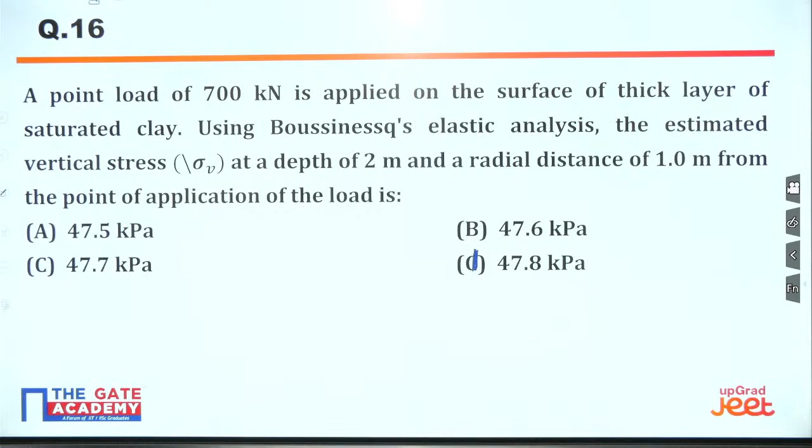All of you have given different answers. Now which one should I consider? Very good, Bhagesh, very good. Now I'll just tell you what is the correct answer for this.

Now this Q value can be calculated by what? Q is already given, this is 700 kilonewton. What is the value of Z? Z is given to you as 2 meters, and R is given to you as 1 meter.

Now what is the value of sigma Z? The value of sigma Z is given by Q by Z square into 3 by 2 pi. You have all the data from here, yes or no? Yes you have. Now 1 upon 1 plus R by Z square, this is the formula you already have, isn't it? You have this formula, put the values, put all the values.

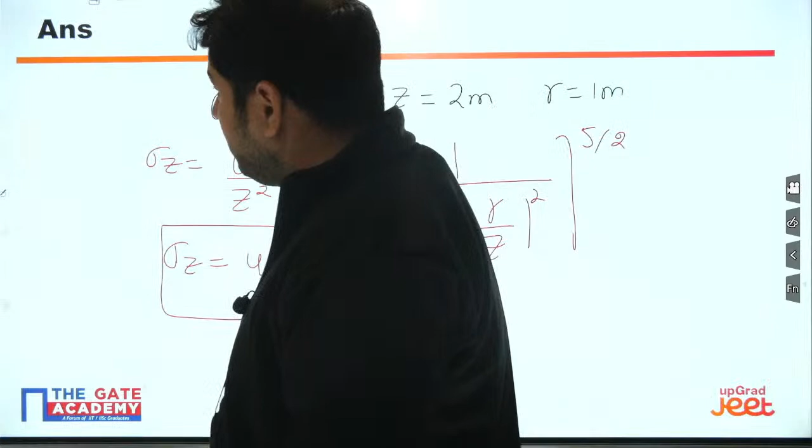You will be getting the answer as 47.8 kilopascal, right? Now tell me something, do you think this question should have been asked? But they still asked this question, why?

Because of the calculations only. In GATE you will find in almost all subjects that there are a number of questions which are asked for calculation purposes only, right? So if you are not strong at calculations, you won't be able to score good. I am telling this thing again and again. Rather than testing the concept, Chetu, they are testing your calculations.

Anyways, let us proceed to question number 17 for today. Everyone is going to answer this question. This is a 2-mark question, and free, these 2 marks are for free. The question has been repeated. What is it representing? The question has been repeated. So I have given you the entire concept of this. Now I want 100% accuracy when solving the questions, right?

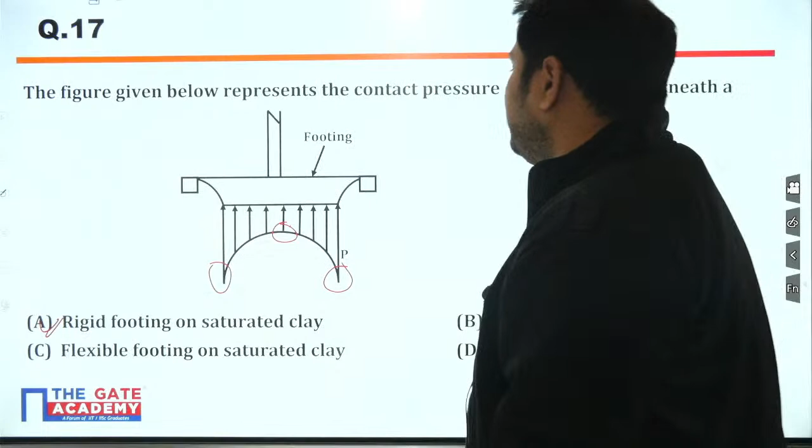So what is the right answer? This is representing the rigid footing on a saturated clay. Why? Because you have maximum pressure at the edges and minimum at the center, and the settlement is also shown to you.

Nikhil Bache, I guess you just joined. Since you joined right now, you did not know the concept. If you watch this video now, you'll be able to answer it correctly because I have discussed this concept very clearly. So try to be present in class daily so you can understand everything, okay beta?

Alright, so everyone is getting the concept. I'll mention it again. For a rigid footing, there are 2 things to be considered for both rigid and flexible footings. One is the settlement - for the rigid footing, is the settlement uniform or non-uniform? Settlement is uniform. As far as the contact pressure is considered for the rigid footing, this becomes non-uniform.

This becomes non-uniform, all right everyone. So contact pressure is non-uniform in such a way that it is maximum at the edges, minimum at the center. I have again written the entire concept for you, bache. I hope it is crystal clear to everyone, right?

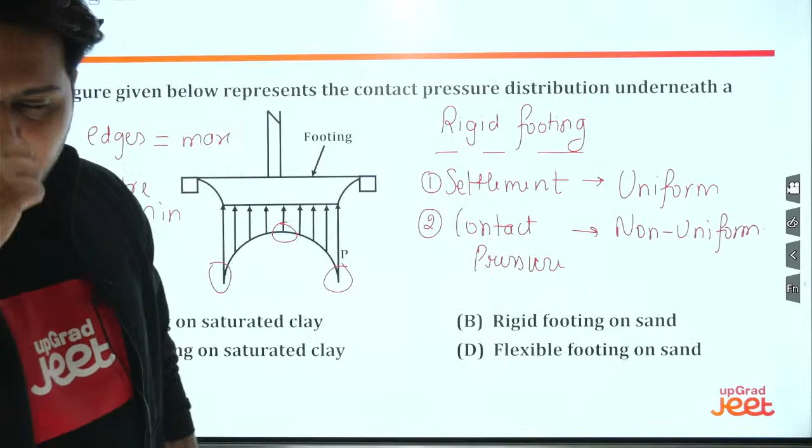And after this, we will start the live quiz. This is the last question in the question series. Then we will start the live quiz.

Alright everyone, waiting for your answers. This is a good question. I'm telling you, this is a good question.

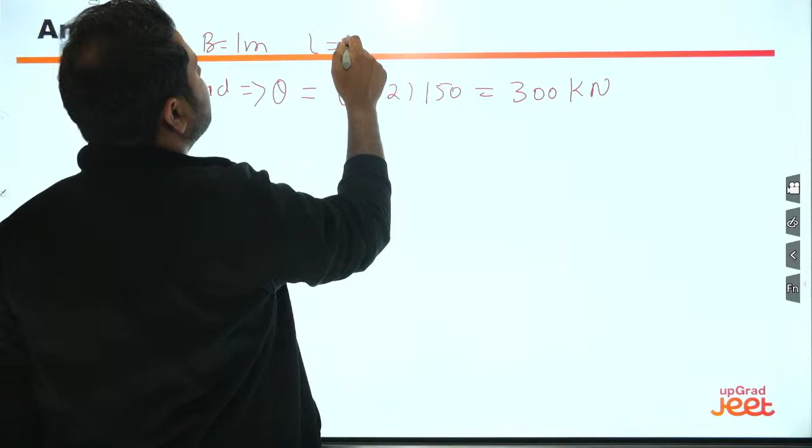B is 1 meter, L is 2 meter, and Z is again 1 meter. This is the data already given to us. Now stress is given by load upon dispersed area. The entire game here is about the dispersed area only. So what is the load? This is 300 divided by the dispersed area.

The dispersed area here - who's going to tell me what is the dispersed area? This is given by, this is the value of Q. This is given by B plus Z into L plus Z. So this is the formula. If you want to remember it for future, this is the formula. Now what are the values coming out to be?

This formula is for what? How many of you are getting this? When you put the values, what is the answer? This is 300, B is 1 plus 1, this is 2 plus 1. So what answer are you getting? 300 divided by - this will become 2 into 3, so this is 6, so this will become 50. How many of you got this answer? This is the calculation as per the formula only.

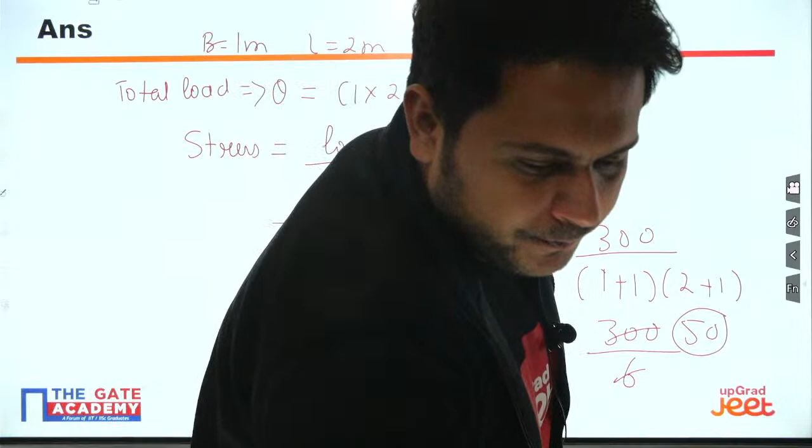This is the calculation as per the formula only. Now, once you are done with this, I'll show you the diagram also - what is the meaning of the one horizontal to two vertical system. Let us move to the next page to see how the distribution or dispersion of the load can be shown.

Suppose this is the footing under consideration. Now there is some load being applied to this, let us consider this as Q. Some Q is acting on it. Understand the diagram and you will be able to understand it more. If I consider the value of B, what is the value of B? This is the value of B, this is what I have shown you.

Now what happens when this Q load is dispersing under the ground? It disperses in such a way that it goes in this direction also. It's not that it will be acting only under the footing. There has to be some other dispersion also, and I will show that dispersion with the blue color. Now this gets dispersed like this also.

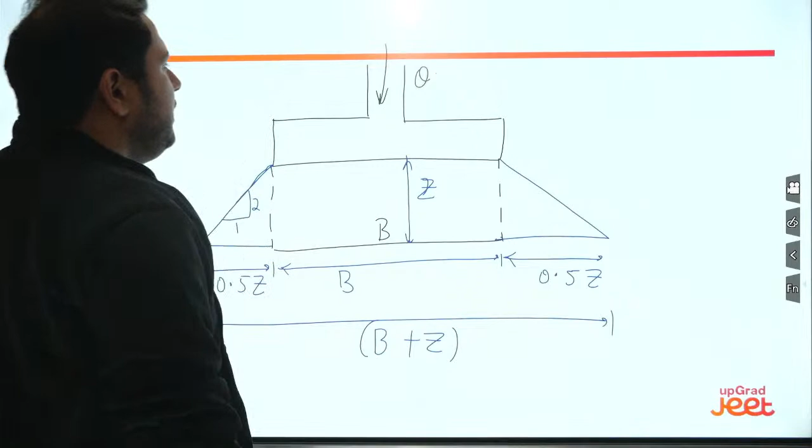Similarly, what is the formula for the stress? The formula for the stress is load upon the area. So area is what? Your one side, that is your B plus Z, and similarly on the other side also, that is your L plus Z. So this becomes your Q upon B plus Z into L plus Z, and this is what I have written.

Is this clear now, everyone? With the help of the diagram also I have explained you. Clear now? Will you be able to do such questions now?

Okay, let us enter into the quiz now. See, today I obtained more questions for you, but again, you people are so quick in understanding. Even we are able to solve more questions in less time today, because your concepts are more clear now. Now only quiz is left.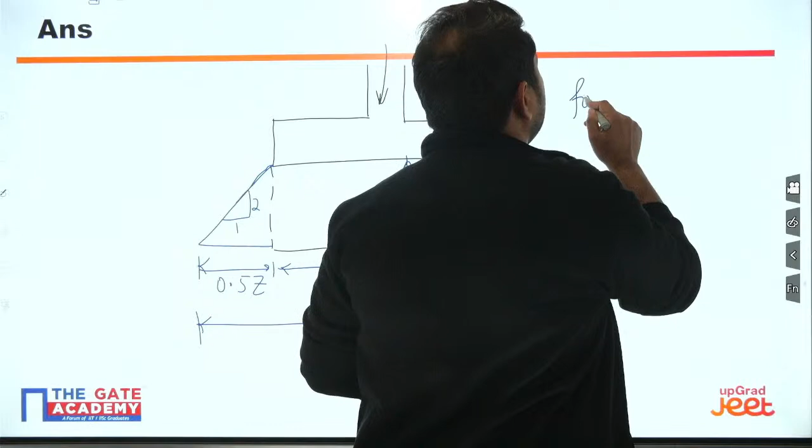Remembering formula is enough for this. If you remember this formula, this is enough. But I will add something to it. This formula is only valid when the distribution is in such a way that for two vertical we have one horizontal. If this situation changes, suppose it becomes 1 by 3, what will happen then? This will become 0.33z, this will become 0.33z, and this will become b plus 0.66z. Is that clear?

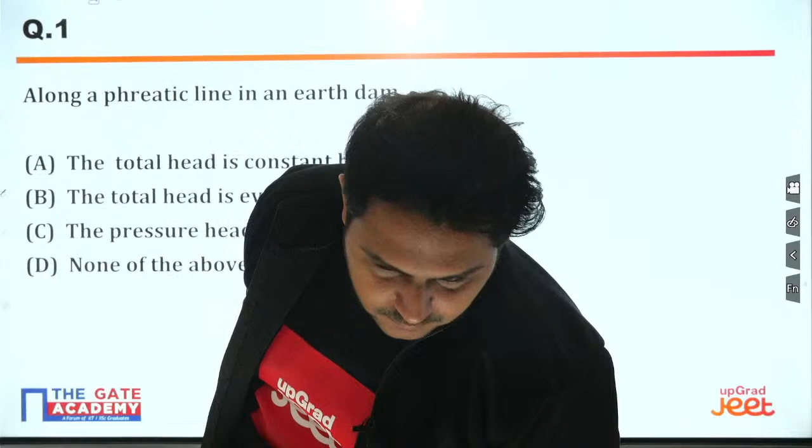Now this is a check of your concepts, and you failed. Everyone is wrong. Okay, I'll tell you the answer. Please try to understand, this is a conceptual question. Anyone who wants to try it still?

Alright, I'll explain it. Suppose this is a ground surface and this is a dam body constructed over it. Here we are having the water, and here also we are having the water. Now, what will happen if I want to make a flow net?

Deepchand has joined. Deepchand, I have mentioned this clearly in the notes. What will happen? This water will have a tendency to flow from here, and it will make such a diagram. Every one of you knows this. Now, whatever is this formation...

...the topmost line. Now, this flow can be like this, and the flow can be like this also. I will show you another thing of the flow also. The flow can be like this also. This can be the flow, right? This can be the flow.

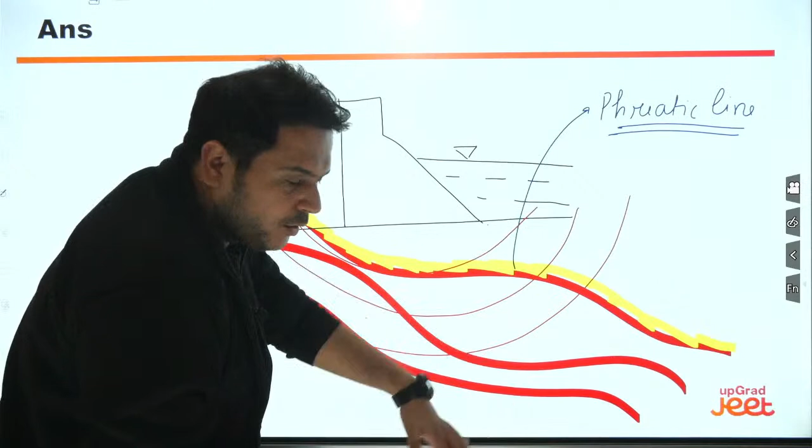Now, what is the speciality of this phreatic line? The speciality is that below the phreatic line, I will highlight the portion. Below the phreatic line, everywhere in this yellow shaded portion, the soil is saturated. Here, this is the saturated soil.

And at any point above this line, I will erase the earlier lines. Now, at any point above the phreatic line, suppose this is the phreatic line, any point here above the phreatic line, we have the unsaturated soil.

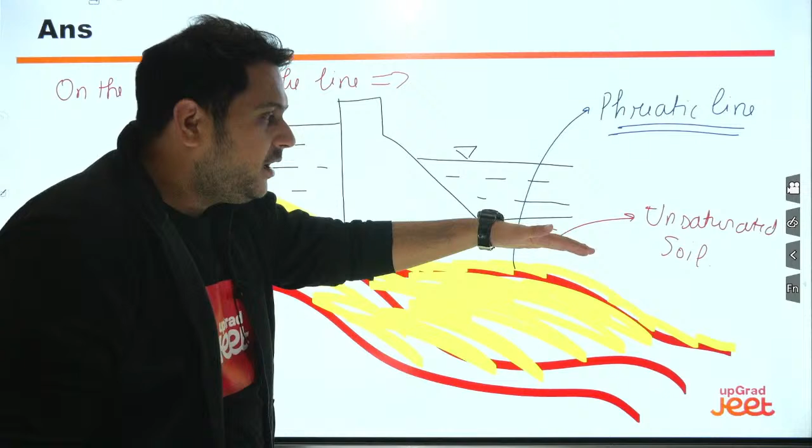So, what is the speciality of this phreatic line? On this phreatic line, I am using the term 'on the line' or 'along the line'. The pressure head - please understand, since all the water content is present below it, all the water of the saturated soil or saturated clay is present below it. So it is assumed that there is no water present on the phreatic line. Above this, there is no water. So, on the phreatic line, suppose there is no water on this hand.

What will be the pressure head on this hand? Suppose there is no water above this hand. What will be the pressure head? Who is going to tell me? If there is no water above it, tell me clearly, everyone, quickly. What will be the value? Tell me - 0? Obviously 0.

Right? So, on the phreatic line or along the phreatic line, the value of the pressure head is 0. Now, if I consider any point below this - suppose this is point A, the pressure head - above this no water, below this water - any point here, this point A, the pressure head will be greater than 0. Below the phreatic line, the head is greater than 0. Is this concept clear to everyone?

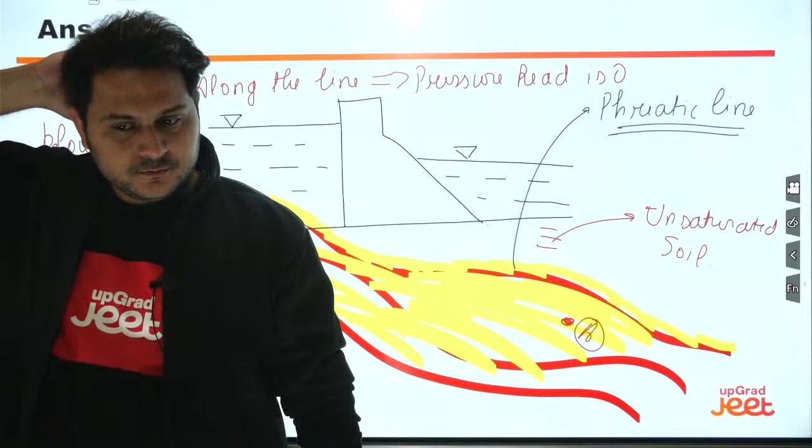Is this point clear to everyone? Ekdam clear, sir. Shall we move to the next question now?

Okay, moving to the next question. All right, the next question is, this is the next question. Answer this question. True or false?

True or false? If you have cleared your concept, you will be able to answer this.

How true? Tell me. Water pressure is atmospheric at all points. Water pressure is atmospheric.

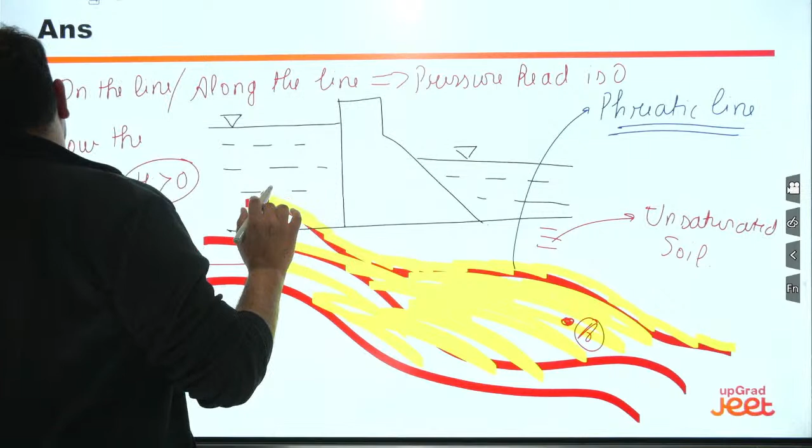Now, please understand. If I consider this point, I will use blue ink now. If I consider this point, this is point A, this is point B, this is point C.

Point A, point B, point C - which of these points have the same elevation? No points. Point A, point B, point C are not having the same elevations. Since they are not having the same elevations, how can the water pressure be the same?

At point B, this is under the soil, this is under the surface, this is under the water. This is even lower. So please try to understand, this is a line which separates the saturated and unsaturated zones. Anything below this will be fully saturated, anything above this is unsaturated.

Now unsaturated does not mean it is dry. It may have some water head here, it may have some different water head here, it may have some different water head here. And even if it is different, it will never be atmospheric pressure.

It will never be atmospheric pressure. Can you see atmospheric pressure at any of these points? Tell me, can you see atmospheric pressure at any of these points?

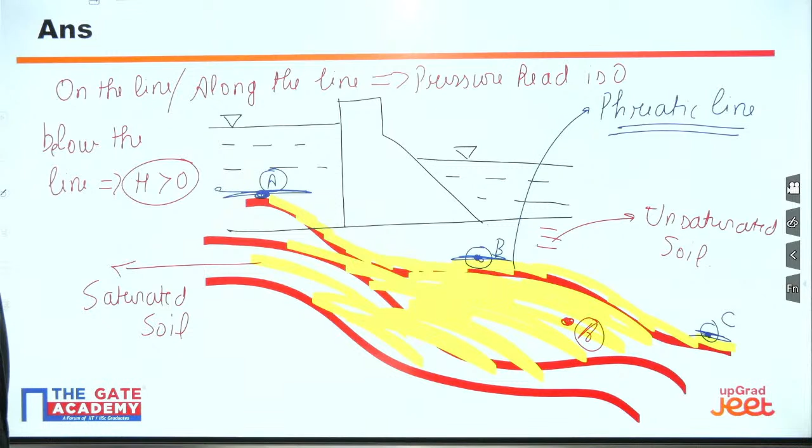So just publish this diagram into your mind. Publish this diagram into your mind. Then only you will be able to answer this, right?

There is no atmospheric pressure. So what they are asking is: water pressure is atmospheric at all points on a phreatic line. No, this is false. Phreatic line is therefore an equipotential line - if this was an equipotential line, there was no need of giving it a different name. This is not an equipotential line. Is it clear to everyone?

Shall I proceed to the next conceptual question? Yes, there was a trap in the question. Okay, the next question is this. This is the next question, tell me, I'll just show you.

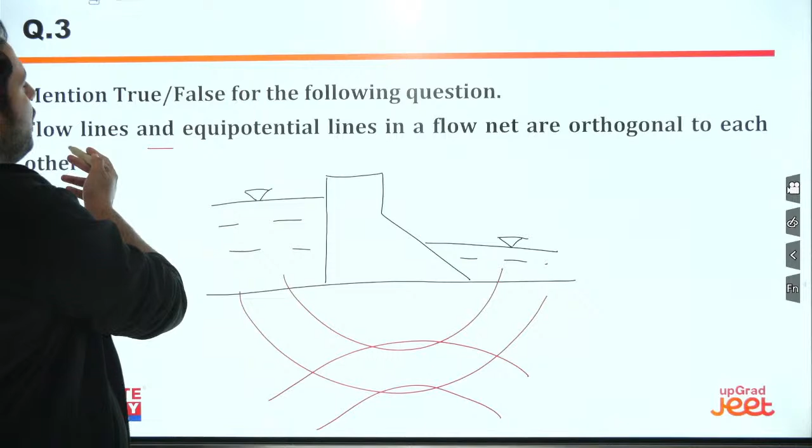So these are the equipotential lines, and the flow lines and equipotential lines in the flow net are orthogonal to each other. Yes, true. Alright, got your doubt cleared?

Shall I proceed to the next question? So the next question for this is this. There we have the next question. Okay, this is the next question. Solve this question.

See, they have asked a formula directly. They've asked a formula directly. Now those who have attended the classes should be knowing this.

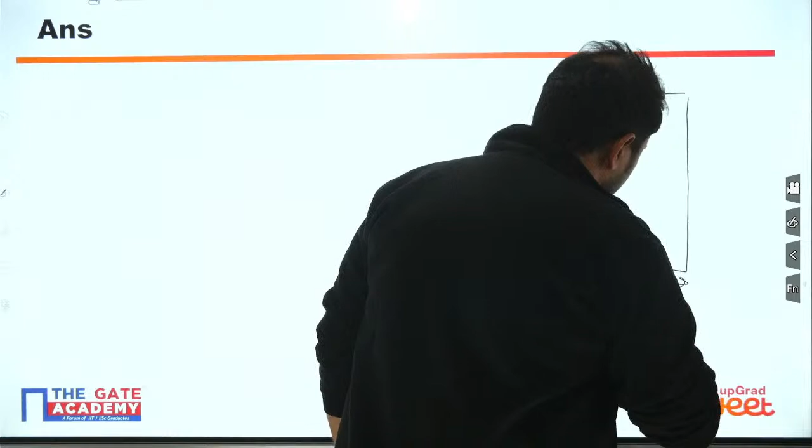Suppose this is the box under consideration. This is the sample under consideration, right? This is the sample under consideration. Now this is the soil, having the A value, and this is the value of the depth. So I have shown you the volume - this is the soil sample under consideration, having A as area and Z as the depth, right?

At the bottom of the above soil, the seepage pressure - if I consider the bottom part of this soil, at the bottom of the soil sample, the seepage pressure is... how do we write it? What is the seepage pressure at the bottom of this?

This is given by gamma W into H. Gamma W into H, where H is what? Where H is what, I have told you so many times - this is the seepage head. H is the seepage head, right? I am doing the entire derivation for you people. So this is the seepage head, just to make it correct also.

This is the seepage head. Now, second point to be remembered is, this is at the bottom of the soil. If I want to correct it, this can also be written as gamma W into I into Z, because H is equal to IZ, where I is the hydraulic gradient. Can I write this one as this? Yes, we can write this.

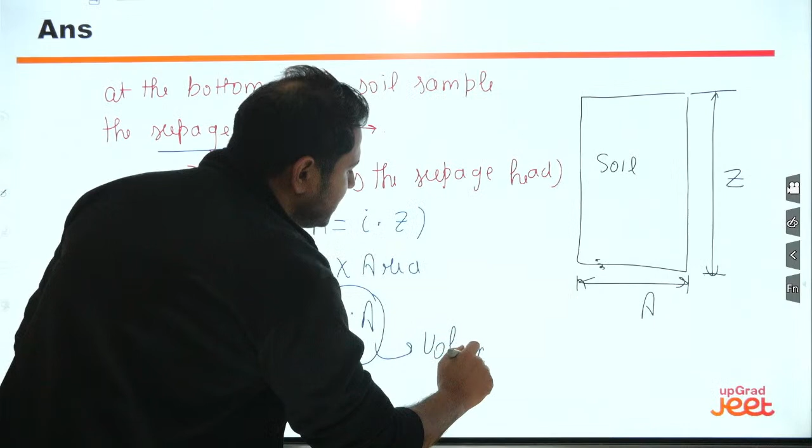Now, seepage force is equal to what? This force can be given by the formula: pressure into the area. Now, what is the value of the pressure? This formula will come out to be gamma W into I into Z into A. Now, this Z into A is actually your volume.

So what is the seepage force when considered with the volume? This becomes gamma W into I. So this becomes your formula for seepage force per unit volume. Is it clear to everyone, this formula?

So what is the right answer for this? Who is going to tell me the right answer? The right answer for this is D. Is it clear to everyone?

Very good. So let us move to the last question of today's session. This is the last conceptual question. Solve it properly, this is the last question of today's session. I want you to answer this.

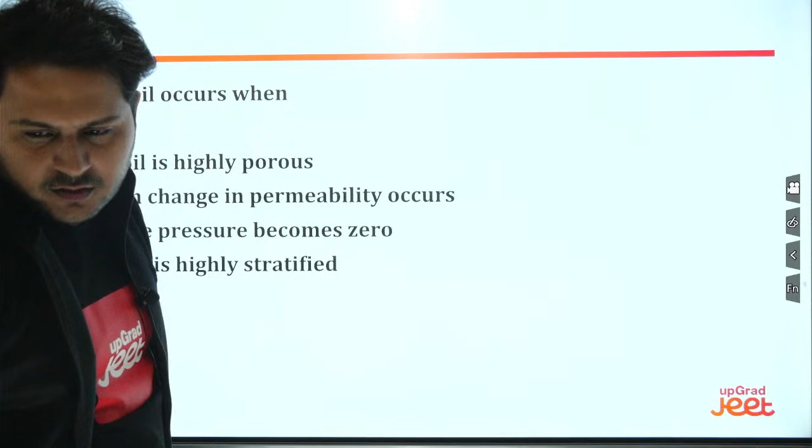No MSQ, this is MCQ only. Very good, Bhageshri. Very good, Nikhil. So this is actually what, please understand, I have given this here in the class already.

Piping in the soil occurs when effective pressure becomes zero. Now when the piping occurs, in order to make the piping happen, the effective pressure at exit is zero. This is more common in sand and gravel - actually, not the gravels, this is more common in silt and sand. You should write sand and silt rather than gravel. So this is about the piping. Effective pressure at the exit becomes zero in the case of piping. Is it clear to everyone?

See, we applied around 23 questions in a span of around 2 hours. If I can make you understand everything and explain everything, and apply 23 questions in just 2 hours, you can also apply 50 questions by giving 3 hours, because you don't have to explain it to anyone.